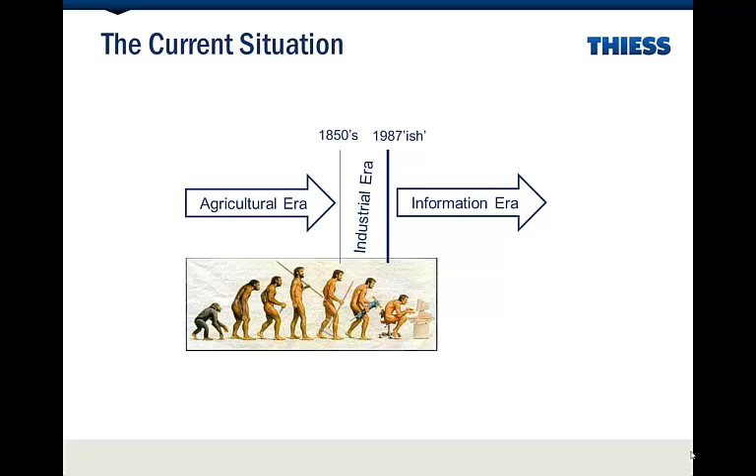I think I might have thrown this one up last time. I've since worked it a little bit more, but I think it's a pretty good icon for the current position we see ourselves in the world, where we used to build things quite manually, with hand tools and no machines at all. Then along came the 1850s, where we used machines, and the machines got bigger and better, and efficiencies increased through mechanical means. But now we're very much into the information era. I think the recent IBM report that they got Ibis World to do actually uses the term infotronics age, which is fine, but information era, I think, or information age is a good way to think about it. That progression there, where you see it going from just the sense of an evolution, and then eventually everybody sitting at a computer. I talk to guys who used to, even guys not much older than myself, 5-10 years older than myself, and they're quite amazed to walk into an office now and see everybody sitting in a computer, because it just didn't used to be like that when they first started. So it's this 20-year period where we've all come to be sitting in front of computers as the first port of call. But as I said, these machines are the ones we started with.

So Thiess's history started in the late 1920s, early 1930s, where there were 5 brothers from the Thiess family who bought this tractor, which they still have a lot of their old machinery.

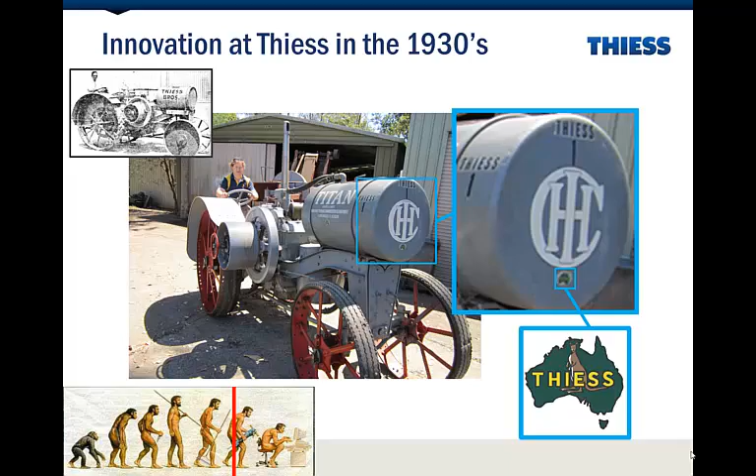This shed here actually belongs to the Thiess family at Sunnybank in Brisbane. They've still got a lot of the old machinery that they've done up and kept in good working order, which is quite interesting. So I went out there and took some photos, and you can see the black and white picture of it from quite a while ago as well.

So that's just to frame up where we started in the 1930s, and then the 40s and 50s. The Thiess brothers had to innovate. Everybody always has to innovate, but they don't actually like to admit to it a lot, particularly in the current day. But as you look through history, you have to innovate to keep your efficiency increasing.

As they started to build more things, airstrips and roads and eventually buildings, dams were quite big. They were always with the latest technology, to the point where they bought a plane.

During the war years, they did all sorts of stuff where they had to get up at early hours in the morning and make phone calls just to connect with each other, because the phone lines were taken away during the war and that sort of thing.

The picture of the Jeep in the jungle there is in Papua New Guinea, where when they couldn't get the machines they needed to build the jobs, they literally went to Papua New Guinea and pulled the wrecks out of the jungle that the American army left behind, brought them back to Australia and fixed them. So that was them innovating with what they had to work with back in the 1940s and 50s.

The drawing here is interesting, because that was their first major contract in Australia. In 1958 I think it was awarded a big tunnel down at the Snowy Mountains scheme, and they were the first Australian contractor to get awarded a big contract. I think it was $58 million or something, and they had to dig this huge tunnel.

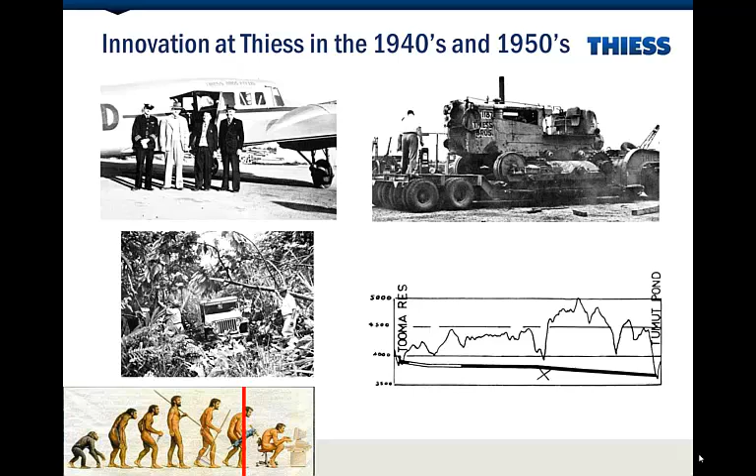So the next photo actually pops up, is a photo from the site where this cross is, and you can see on the profile of the land, it's the lowest point, so they needed to use that to access the tunnel for ventilation, and also getting machinery and everything in there.

So I think there's an interesting passage. Again, I know you've got the architecture and building focus here, but it helps people, I think, if you can think about engineering projects as being more general. Certainly one thing the computers does for us is actually enable us to think like that.

So I'm going to read a short passage which just describes the scene at that site when they first started.

Jacobs, who's a guy they brought out from America, was a real guru with tunnels, suggested that a small bridge be built, and the site located on the far side of the creek where there would be enough room for a workshop, offices and parking space for the underground equipment to be used. He then flew back to Sydney to design the equipment, and Stan got things moving at Deep Creek.

"I didn't have any surveying instruments," he said, "so I eyeballed the area and set a couple of D8s going on the site." An astonished Snowy Mountain Authority engineer appeared a few days later and asked, "Where are the drawings for what you're doing at the portal?" It was news to Stan that he had to supply drawings to get approval before starting work. He kept the men going, supplied the drawings later, and the Snowy Mountain Authority engineer winked at this initial piece of unorthodoxy and kept officialdom happy by giving written permission to level the site sometime after it was completed.

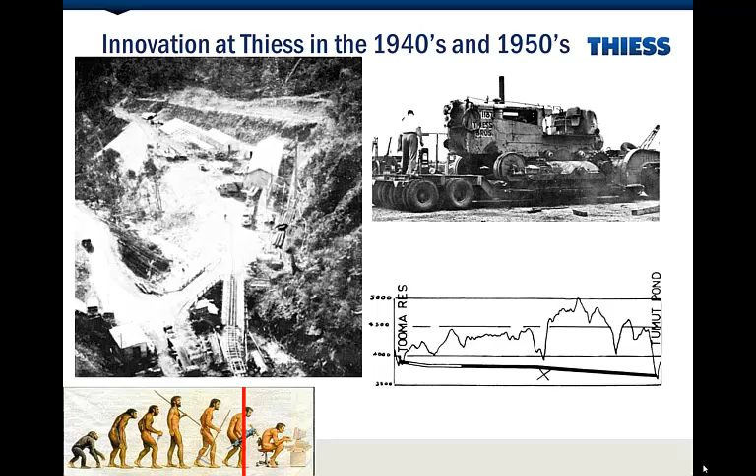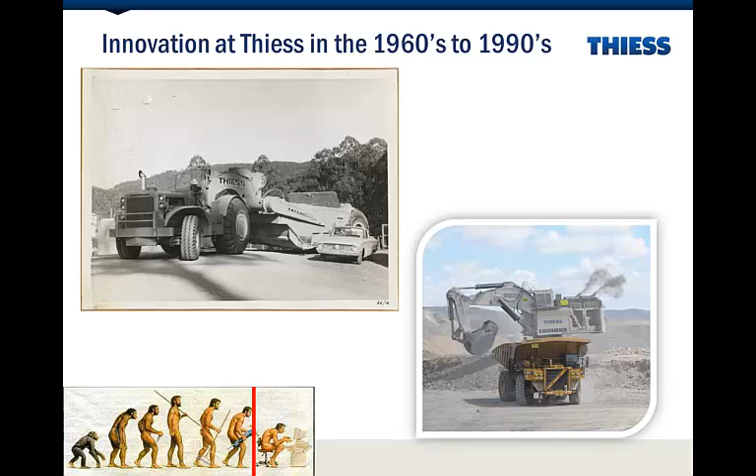So 60s to 90s, as I say, it was all about machines. This one's actually probably more recent—probably one of our latest photos from the 2000s, with the big 996 there and a large mining truck.

But in the 2000s and 2010s, I've got a picture of an iPad, but I don't mean it to be an iPad, it's just a computer. I've shown it overlaid there, and you might have seen the progression as we go with that red line on the timeline as well. So now we've got this extra layer where the computers overlay the machinery.

And in order to innovate, in order to increase our efficiency, we need to get smarter with the computers, get better computer systems that control the machines, that control the delivery of the projects, your survey set out and all that sort of stuff. All the information comes through the computers. So one of the best descriptors for those sort of workflows is BIM, building information modelling.

If you think of building in the sense of building anything—a lot of people would have liked to have chosen something different, but the way the software companies are dictating in that space, because they're the leaders, that's the term they chose. So we're talking about model-based construction, to try and simplify it a little bit for the older generations. But I think this one also helps too.

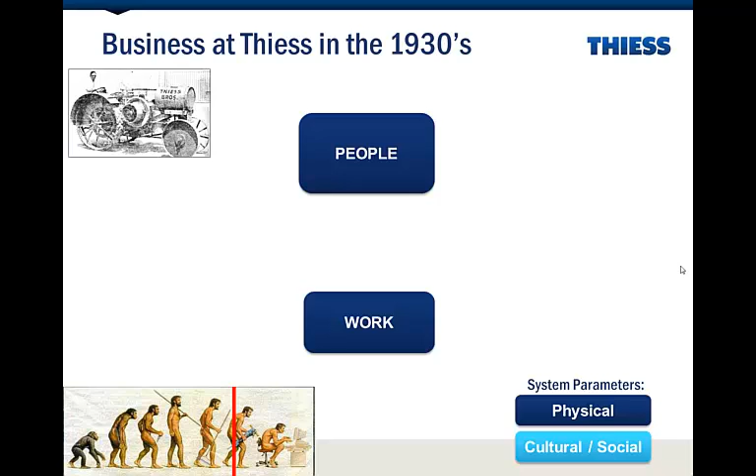So to wind that timeline right back and talk about a framework for business, where the Thiess brothers started up—they had people and they had work, and they were the two most important things. Look after your people and get your work done. So they communicated with each other to deliver the work, and the work earned the money that facilitated their life.

So now you go to the 40s and 50s. Actually, pretty soon after they started and got to become a big company, it was obvious that they needed some business minds and some accountants and that sort of thing, because the guys didn't have any qualifications in engineering or anything. They were just really passionate about getting some good work done.

So there was this phase, and it's all actually documented in this book here, which is why I know about it. We're one of the few companies I think that's had a good book written about their history, so I'm sort of just reiterating stuff out of there.

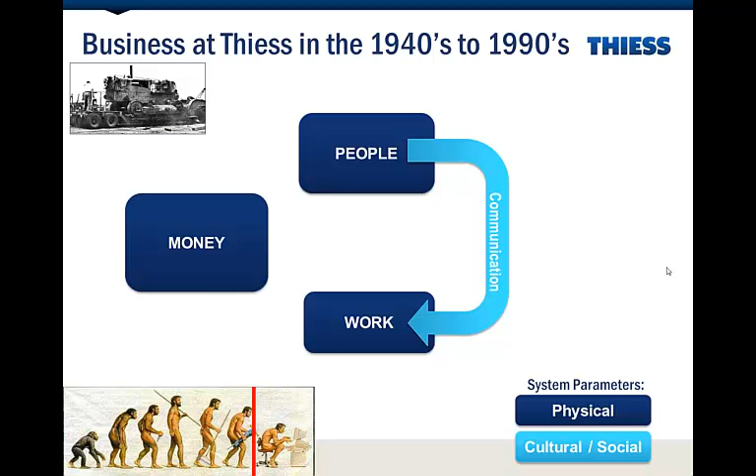But in any case, as I say, between the 40s and 90s, it was really about the machinery doing this work, and as long as you were keeping up with the latest trends there, you were successful. So your business relationships with your vendors and your suppliers, and your people organising your money for your company, became very important. But again, the money still facilitated their lives for the people.

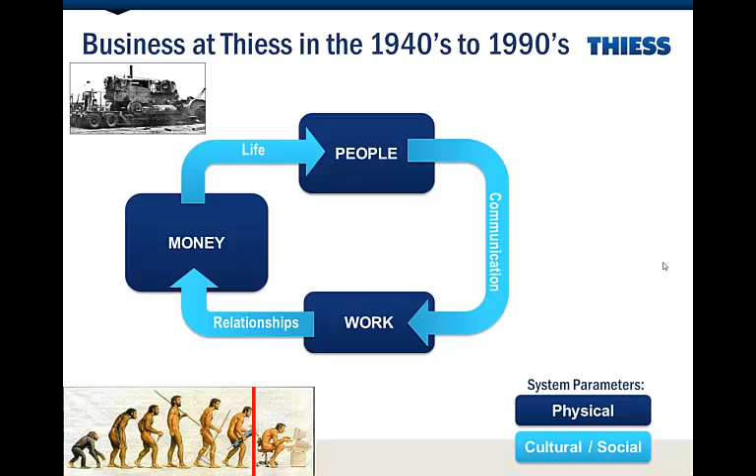So now, I think you've got this other one in there, which is the 2000s, and particularly as we move forward now, computers are becoming infinitely influential with what we do. And that's pretty broad to say computers. What that's done is actually plucked the technological element out of work, because there's still a lot of technology trends in here that we need to keep up with, the machinery and survey equipment.

But this one's the one we're struggling with the most at the moment, and we all need to work together to get it right. The information is the thing that has to go into the computers, and then it has to be communicated out of the computers to get into the real world. And with people who learn a different way of doing that, currently in the positions managing the company, it's really difficult to join the worlds and explain everything properly, because there's never any time.

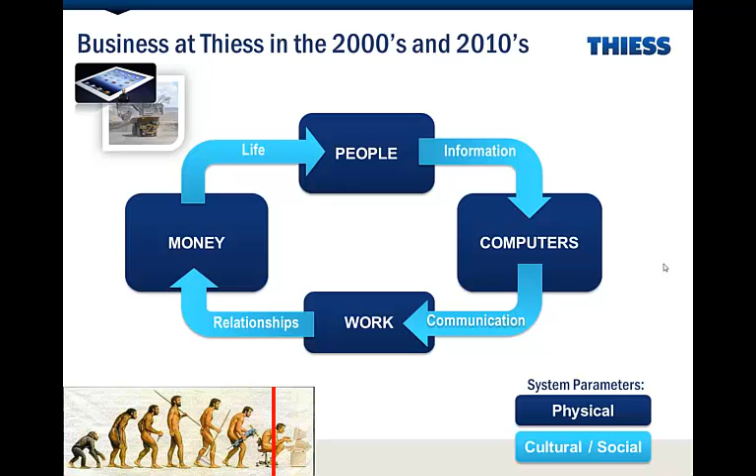When you're running a business, you've got to make money. So these sort of discussions are really useful, and these are the sort of presentations that I'm spruiking around the place, I guess, to try and raise our awareness about these things.

So back to the innovation term and the noun versus verb—there's just some icons there again to stress the point that there are two forms of the word. Renewal is a very good word to try and think about innovation. You're constantly renewing what you're doing to stay ahead of your competition.

Obviously, a positive change is an efficiency-increasing change, and innovation really is just a bigger word for change, but it's a structured change. In everyday terms, you could say we're just making the best of what's around, and combining things is another good word.

So, I mean, you look around you, with everything you do in your life, things get combined to remove an interface. That's increasing your efficiency with so many things that you do in the current world. I think that's a good way to think about innovation.

This little cartoon is also another one I often use to make that point. At the end here is an interesting point where human nature is to make a knee-jerk reaction about any suggested change. I've overlaid that to tidy it up and make it fit with that noun versus verb situation. The little triangular mouse at the end is a typical knee-jerk reaction I see, where he doesn't want to make the change because he perceives it to require extra effort, when actually the end result is achieved much quicker by using what they're proposing.

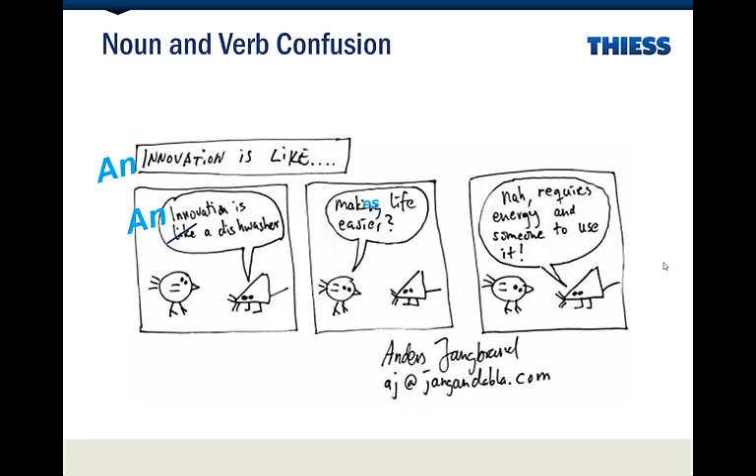So the big bang for buck, BIM and model-based workflows. So we'll talk about that.

Now these slides I've got here are actually from a BIM in Practice conference last week, chaired by Building Smart. Are you familiar with John Mitchell? When I was a cadet architect in 1974, John Mitchell worked in the same office I was in, so I've known him for nearly 40 years. He's a very passionate leader in the industry for BIM and model-based workflows, and he chaired the conference.

Last week my best and brightest engineer with BIM workflows came from Melbourne to present the slides that I've got here. He started with this one, which I thought was interesting because he's saying, what's the end game? Why are we doing all this stuff? What's possible? I don't know whether you've seen these.

I could certainly send through the links after today. There's places in Asia where they're putting buildings up in a frighteningly short amount of time, and telling everybody about it without any reservation for keeping things close to their chest. I think this is a real big message for the Australian industry. We can do things a lot better, a lot quicker, and a lot of it's about modular prefabrication and this sort of thing. But BIM is an enabler for that.

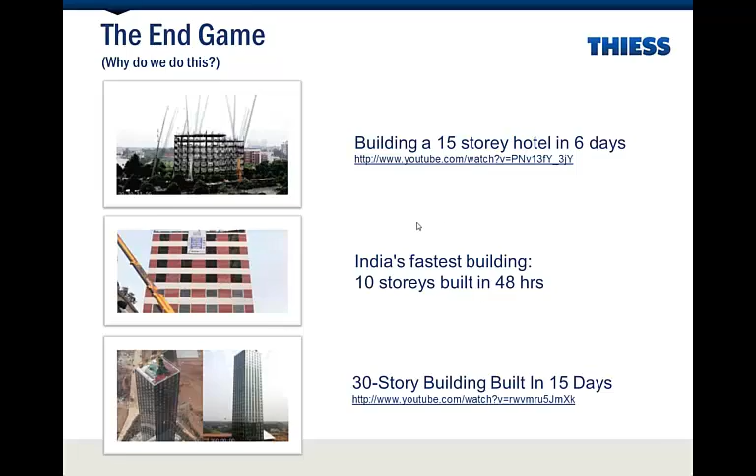So innovation is the way to go to get things moving, and as I said, BIM's the main one we should be focusing on. Now this one's pretty startling, because it's saying, of all the countries around the world, who's adopting BIM at what rate?

And the blue one is us. So we're here. I think this slide came from Davis Langdon. There's a lot of research being done and people writing papers about why and what's happening, but it's charts like this which really bang it home.

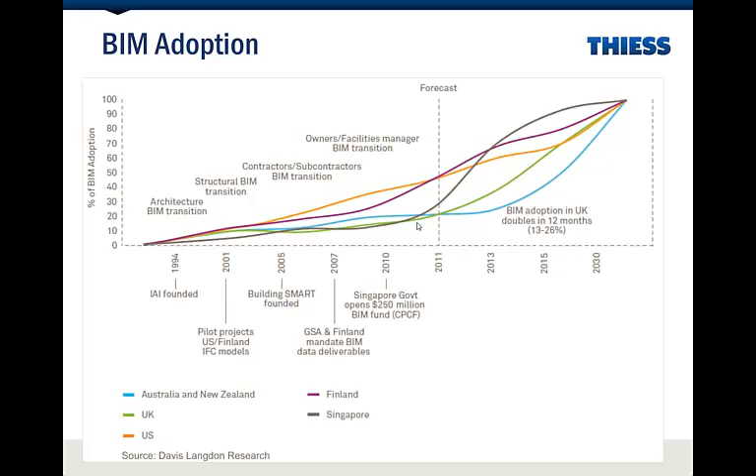But then proactively thinking rather than doom and gloom, these sort of slides are also very useful to show people where in the delivery cycle of a project BIM is going to give us the benefit. Now that's a big chunk, and it really is hard for people to think all the way through to 50 years after you've built a building.

But the reality is we know that there is this infinite—well, not infinite, it is finite—benefit that can get there. But you've got to make the decisions early to get there, because there's only a little bit of benefit right at the start. If you change the way you're doing things, if you start working with these model-based workflows, you can access all this value later on in the project life cycle.

We're getting a bit mixed up right now between IP issues, where people think particular pieces of information are their IP. It's easy for us in a sense because we don't hold any IP in information—our IP is how good our people are at getting it done. Whereas people before that, your designers and your architects, the information is their output. So depending on how good they are at making that information, that's where their IP comes from.

It's interesting, I think Rick, that you get me to come down here and talk as a contractor in many ways, because I'm sure you're well aware of all these interplays in the industry. But BIM is the great engager for everybody—it's everybody working on the same platform, integrating others that don't talk to each other, and everybody understanding their work much better as we do it.

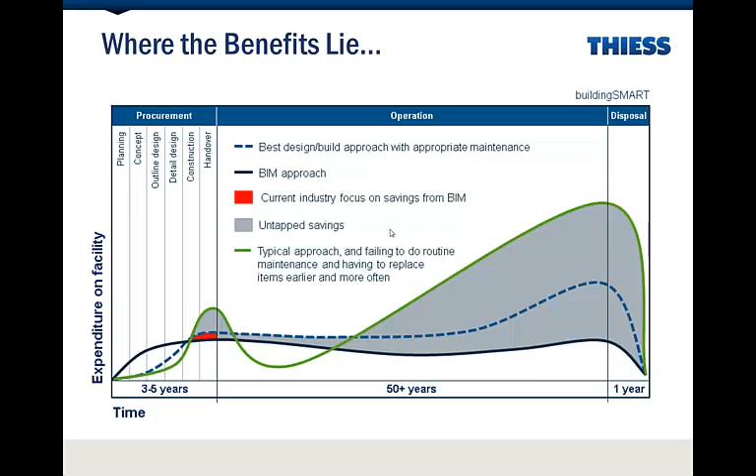I mean, guys like John Mitchell are very, very helpful. I was really pleased with that conference last week where he's now heading off to the federal government in Canberra to try and get some funding to push BIM and standardise BIM, which is exactly what we should be doing.

This one will get blown up in a couple of slides where you see people out on site with iPads. We're starting to use the models on site for toolbox meetings - I think I had some of those photos last year as well. So just over the last 18 months, things have really started to ramp up in terms of relying on these models more than the 2D drawings, to actually materialise that in the real world.

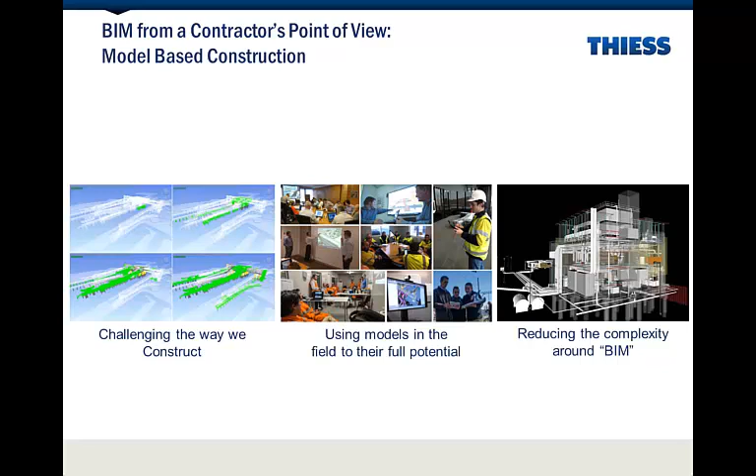And there's another one. So now we're about reducing the complexity around BIM. BIM has been seen over the last, probably up until about 12 months ago, as something that was just scaringly complex. But it's certainly not the case, and a lot of our internal work in terms of putting strategic plans and capability statements and that sort of thing in place for us to use with our clients is to show that it's not that complex and that we can actually leverage it to build things better.

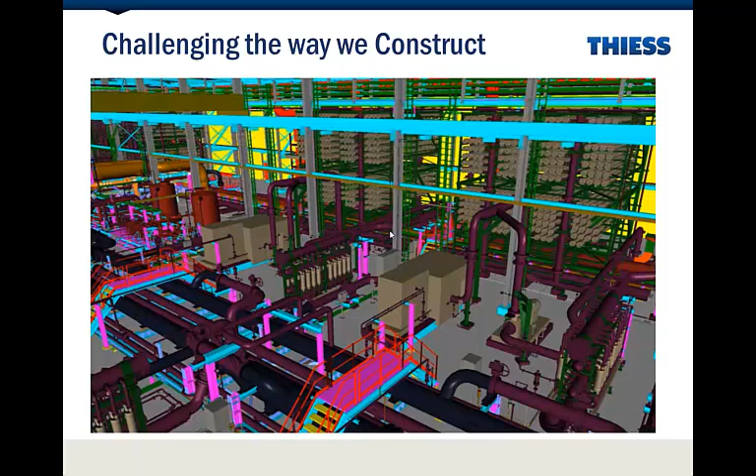I think I showed this slide last time. I think it's very indicative of the fact that we've got a model - maybe that wasn't the right slide, but I thought it was going to be. That's a shame, normally we might see it later, because these slides have actually come from my guy in Victoria that I'm presenting. But I do have a version of this slide where you see the model and you press the button and it just literally fades into reality from that same perspective, because that's the model and we actually built exactly that.

But this one's a recent one that we've done down in Melbourne there with the Regional Rail Link. The guys are actually getting models in their hands where they can simulate the vehicle movements, they can measure things, they can understand risks well ahead of time. So safety is a big thing, and safety is almost the ultimate thing in the industry, because it's a KPI that we really have to work to. And if you can have an information management system such as BIM that's going to help you reduce your safety and also your process risk, technological risk, then it's a very useful thing.

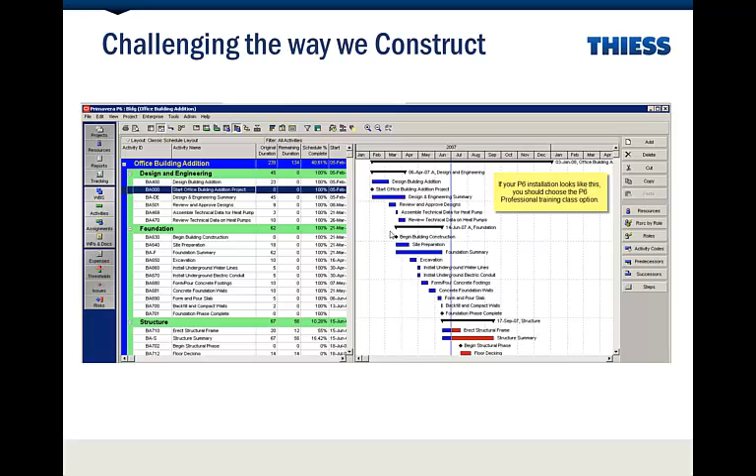As I said, we're challenging the way we construct. This is a view of a P6 program, a Gantt chart that has been the norm for quite some time, probably 20 years. But we're saying that's not what we're going to do anymore.

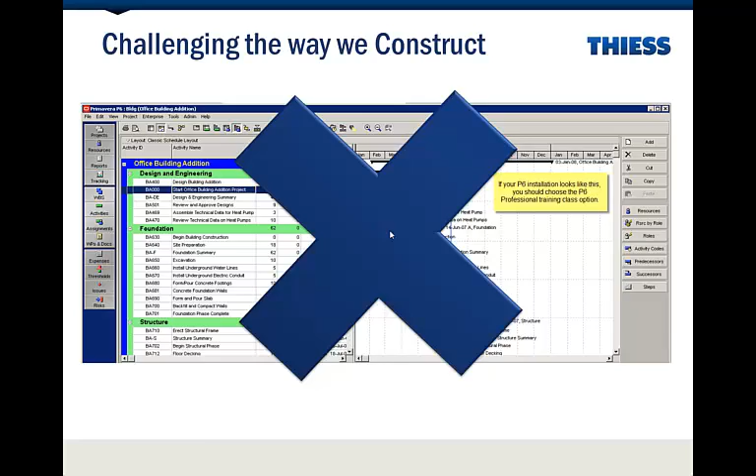We're going to use more streamlined forms of communication, communicating information in terms of graphical displays. As long as we know that whatever we're exporting from a database or a model is correct, and the graphical information represents the time change information, then there's nothing wrong with doing that, because people understand it much quicker.

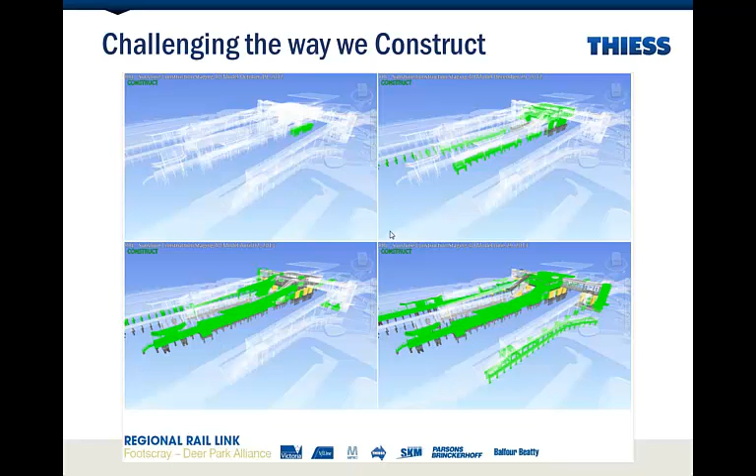Here's that one blown up where you see a railway station we're partway through building in Melbourne at the moment, and you've got a progress timeline there where they're showing what they've done. The green is the work that's been completed as it progresses through time, and the date rolls around with the little white text on top.

So now this one should play, and you actually see the model that the guys used to do a package of work over Christmas. This is the Regional Rail Link, and you've got a heap of machinery there. Every vehicle in this model, and this is just one perspective with all the activities rolling around.

You can navigate yourself around, press pause, select things and get information out of it. But as a distributable piece of information, you save a video file. So this is a video from one perspective. We'll see a couple of other perspectives as images later on.

Basically, it's one of the most horrendous situations to get work done, because you've got live trains that need to keep going. So the guys have got to come in, do the work, and get out again, as per the negotiated timetable with the rail authority. And the guys modelled everything in advance, so they know where every vehicle is going to be every hour that's involved.

The big win story for this package of work we did over Christmas in Victoria is that they actually encountered some unknowns throughout the delivery, which is what always happens, and that's where you lose your targets and your progress.

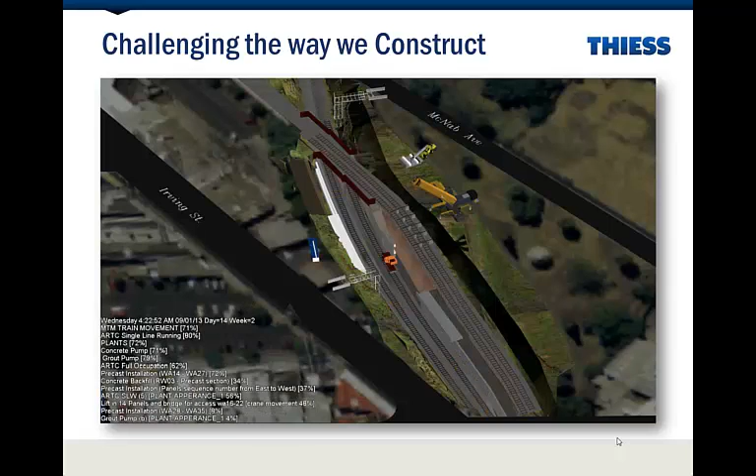So to have a mechanism that enabled them to make that time back, it's really hard to put a return on investment on it. People always say one of the inhibitors for BIM's been that you need to tell me what the return on investment is. Well, it's almost past that now. We've got some numbers here which show how many hours we actually saved by modelling it in advance.

This one is another version where you can see what I was talking about, with the model fading to the real situation. You really can't argue with that. The project was documented and modelled in the computer ahead of time, and we knew what we were going to do.

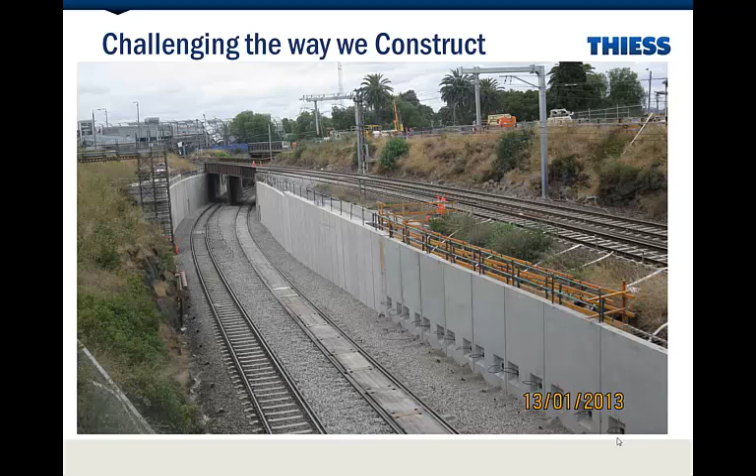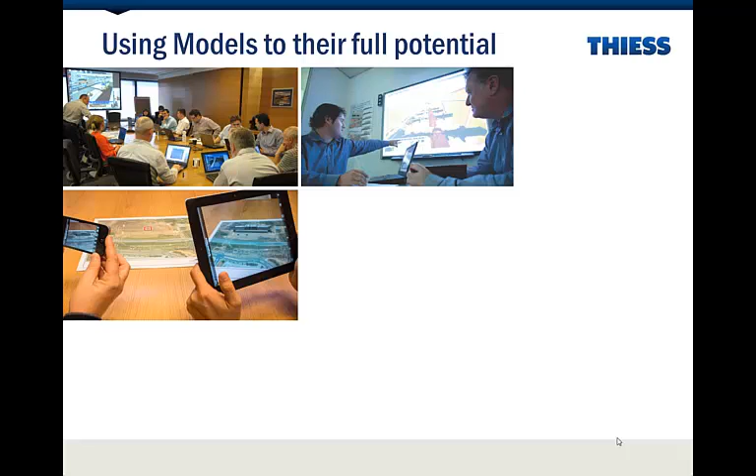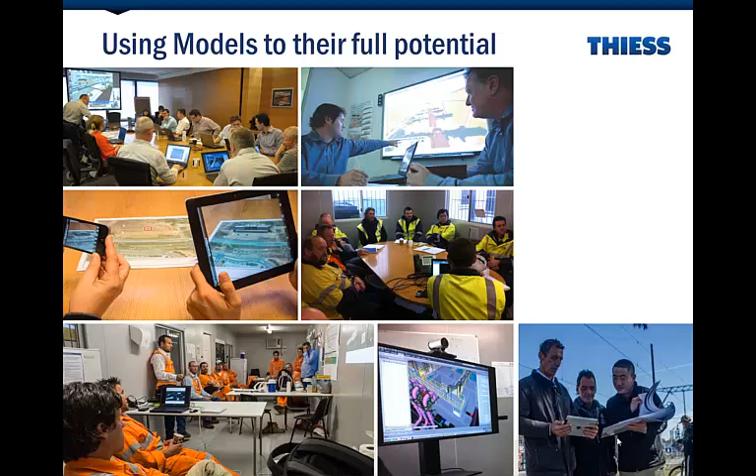That's a toolbox meeting that we had at Vic Desal, and there's a toolbox meeting we had down at Regional Rail for that package of work that we saw the model for. That's a senior guy on site with his iPad, and they actually had a race to see who could get the information first, whether from the iPad or the set of drawings, and the iPad killed it.

So there's another guy on site with a handheld. Everybody's connected. Wi-Fi's a fantastic thing, and even nowadays you've got 4G coming along, which is quick. That little thing there I bought last year is the 4G wireless. You can have 15 people connect to it, and the speed's actually better than my cable at Western Suburbs in Brisbane. So the speed's coming, and a lot of people don't understand that's what the NBN brings to us, the connectedness.

This is a work pack where a supervisor's dumping images out of the model to show his sequence of work and help communicate what needs to be done with his guys in the field.

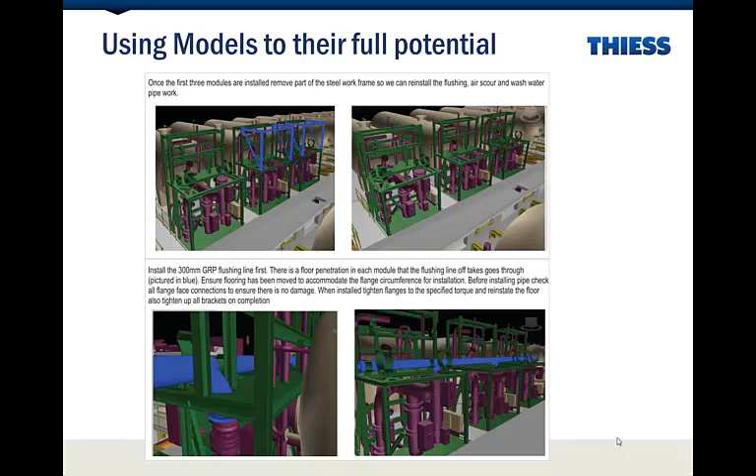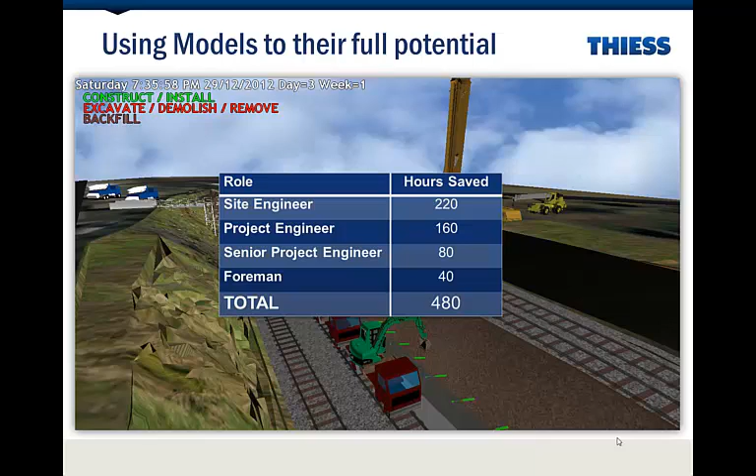Ultimately it can be viewed as a tool. We have design managers, planners, estimators, document controllers, cost controllers, and procurement people, without even mentioning engineers, project managers, construction managers - these are just core disciplines of people that have a job to do and have a stake in the BIM.

Because if your BIM is correct and corresponds with your 2D documentation, it's an easier place to get information from. You can go in, pick something, right click, and find out who's supplying this, what materials it's made out of, how long it is, isolate it, have a look at it, all ahead of time before you even get out into the field.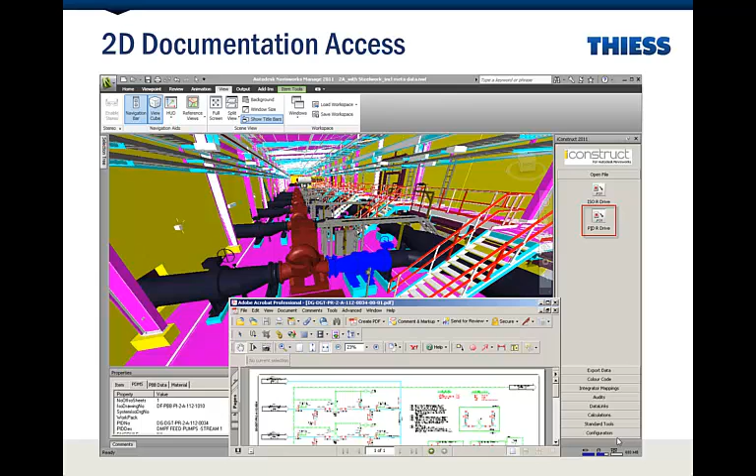This is a good screenshot from a typical model review where I think there would be an architect's model overlaid with a designer's model. It's particularly good for that interface because you can take both of those models and put them together well before even the contractors come along.

During design development, if you overlay your architectural model with the designer's or engineering model, you pick things up that aren't consistent and the engineer's going to push back on things. With conventional information workflows and 2D workflows, the turnaround is much longer because you'd see a marked up drawing, then somebody lodges a request for information, puts that into the doc control system, and weeks later someone responds to it.

Whereas this way, if you're all live, we've done model reviews in a live situation with designers where we've said, no, you've got to move that, it can't be there. They note it down, it's tracked as part of all these viewpoints. So the guys say this one, they've saved that viewpoint, they've circled it and said, put the comment in over there, what is that?

So move east to avoid the trenches. You note that there, you can say who's relevant for the comment and what needs to be done, and it's all tracked.

And then using iConstruct that I showed before, it's just a button you press at the end of the meeting, which collates all that work into a PDF file, and then you lodge that onto the doc control system. Because then anybody can get it, see what happened in that meeting, go and do the work they have to do, check it off, and the world turns.

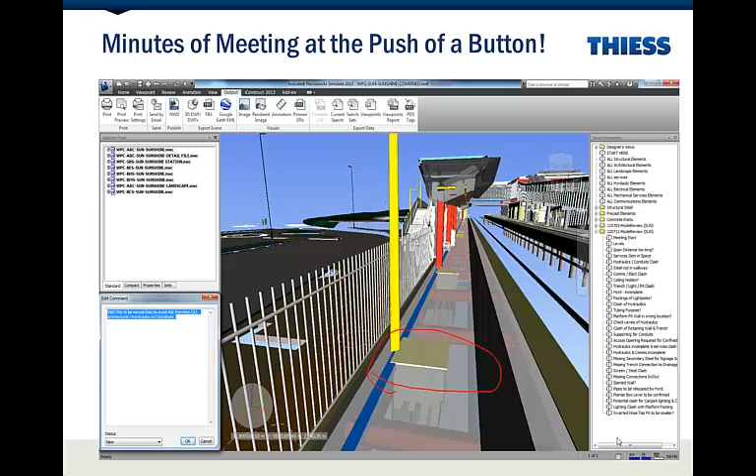So there's the PDF export from the Regional Rail project. It's just a template - it's sucking that information, sticking it onto a PDF file, and making sure that we don't get that problem on site. We fix it before we get on site.

Quantities, we're getting there in terms of people signing off on their model. When the legal factions of the world are happy with the risk exposure and that sort of thing, the designers can start actually signing off on their models for the quantities, and we can order materials and all sorts of things directly from the model.

So this is actually a quantity export from the model. It's just a spreadsheet. Everybody's trying to phase spreadsheets out. They're still very useful, but the world needs to get to a place where we don't actually rely on spreadsheets. In any case, that's a quantity export, so we'd call that a material takeoff.

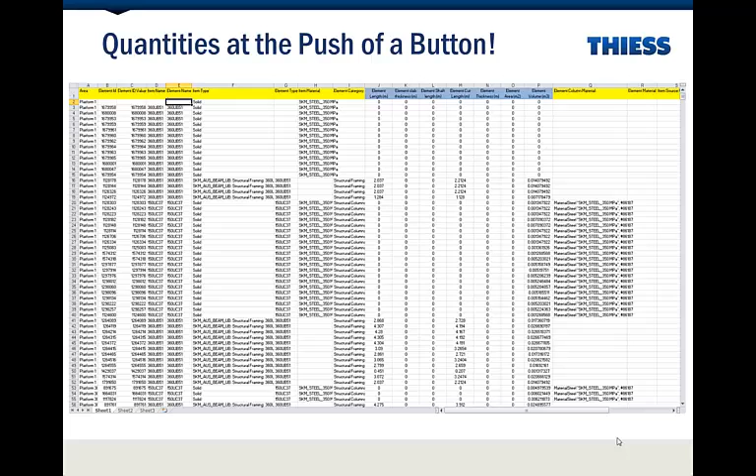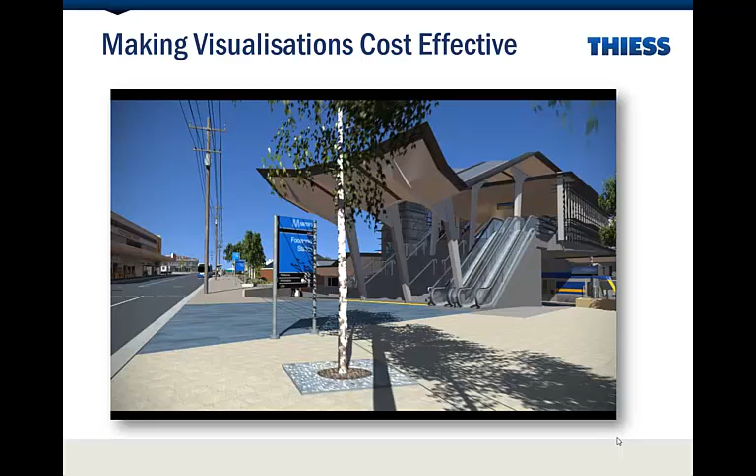Particularly with jobs in built up areas, government clients are quite demanding of nicely rendered representations of projects. It's interesting when you're working in mining and with mining consultants, they really don't care what it looks like. So you juggle both worlds, and we pay consultants generally to do a nicely rendered model if we have to have a TV exposure for the design, or certainly magazines and things like that. So this is an image that's been done for the Regional Rail project by the architect.

And I've probably raced a bit, but this is the last slide. I think it's a good one though. The story behind it is very interesting. You saw all those models that we had for Regional Rail.

There was a guy on site took it home and had it on his laptop and was mucking around, and his son or daughter got on there and thought it was a computer game, so had a bit of a look around. Anyway, his 7-year-old child didn't go to bed, went into his room and did a drawing, stayed up all night apparently thinking about it, and drew what his dad was looking at on the computer.

And this is supposed to be a tower crane, and the way he interpreted it was really not too far from what it was. He's put some machines and stuff in there. But yeah, it's a great story because he engaged with his 7-year-old son with the work that he was doing. So that's a big high level story for BIM, is that it really helps everybody engage with each other and understand things much better.

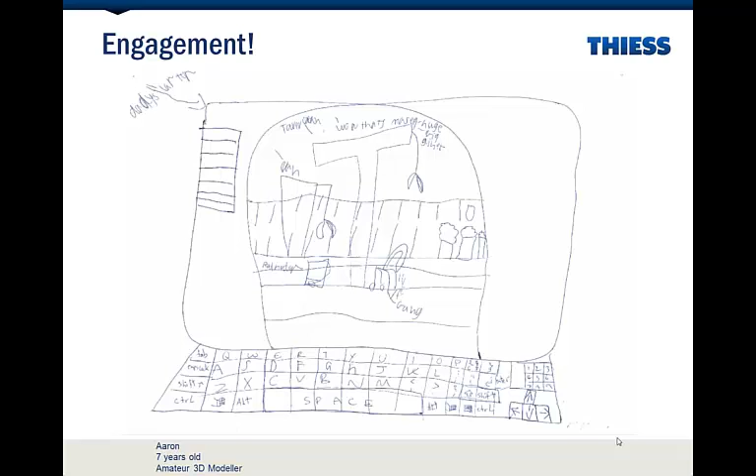So plenty of time for questions and discussion.

Did you find initially that it was difficult managing what you produce modelling wise and your information input into what practically goes on site, in terms of contractors understanding, taking off from the model, taking off what they actually had to physically do on site? Did you find there was any...

I mean, for me, I understand the process. I've seen many things get materialised that were a model, modelling things and then seeing them built. But I get your question. The guys on site haven't come from that background, so you've got to work with them. You've got to get them to do the work.

So we actually just print a lot of images. Where they would have previously got a stack of drawings and a construction program, they'll still get that, but we'll save out 200-300 images, viewpoints in the model, and just print them. Because on site, the game is to get the job built safely and as quickly as possible. So if someone's asking you for some information, as a project engineer, you give it to them if you can. And if the work crews are saying they want to see a folder full of printed images, well, that's what you give them, because it helps them do their job.

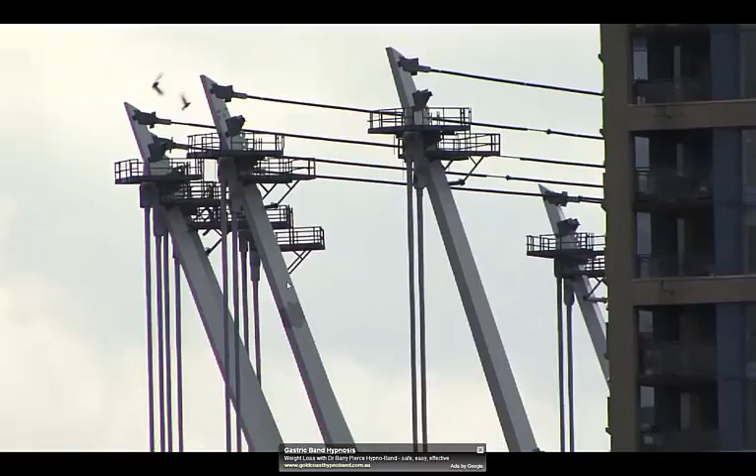Man, sometimes you see things that absolutely boggle your mind. I mean, you just go, how did they do that? Let me set it up by this. Over my shoulder here, you can just kind of see BC Place. I'm in Vancouver, British Columbia, and we have this place called BC Place. They decided to put a new roof on it, one that opens and closes. The only thing is, it won't open or close in the rain. But who needs that, right? It's taken them like 2 years to put a roof on.

So this guy sends me an email and says, you got to take a look at this. The Chinese built a 15-story hotel. That's right, 15 stories. A lot of people build a 15-story hotel in less than a week? They put the whole thing up, the foundation, all the floors, and they even say it can withstand a 9.0 earthquake. Nobody got hurt. They worked 24 hours a day and put it up in under a week, I think it was just 6 days.

So take a look at this. We have some time-lapse photography, and you won't believe it. I mean, take a look at this. And then here's the deal, I'll be right back, but take a look at this. You'll enjoy it.

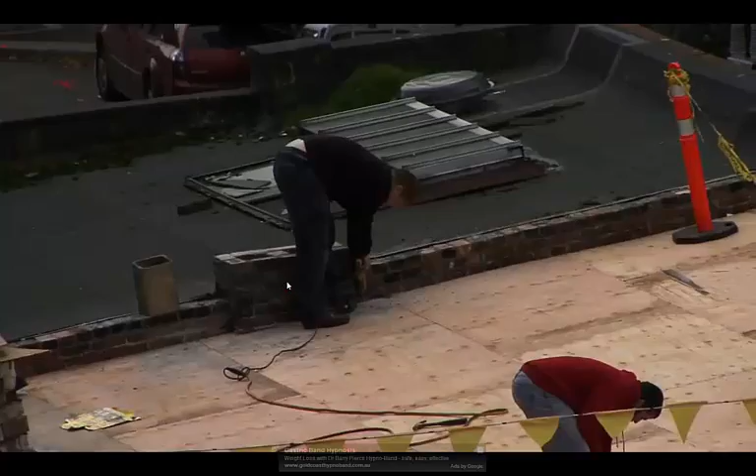So is that not the most unbelievable thing you've ever seen? A 15-story hotel built in China in 6 days. We have some guys just happen to be working on a roof over here, and it's a simple thing, they're just putting on a small little roof. We'll get a picture of that as we go out. I bet it's going to take them at least 2 days to finish that project, maybe 3. Hey guys, move to China, you can put up a 15-story hotel in 6 days, no problemo. That's not Chinese, but it's amazing. This is Doug Coy, so what do you think?

Yeah, so my point about the nice flat site, the number of cranes around the site, all able to work - but there had to be a huge manufacturing facility somewhere. Whilst the actual putting up of the thing may have taken 6 days, there would have been months of prefabrication. Yep, months and months, and it's a very repetitive building, it's a pretty dull building really. So yes, it's doable, but it's kind of a false picture, isn't it, in a lot of ways.

That's why it made me wonder, I mean, does that sort of approach - you talked about Laing O'Rourke and Ray O'Rourke's vision of building as manufacturing, and certainly Laing O'Rourke in the UK have moved towards, wherever possible, modularisation and so on. But how does that affect you guys, given you're doing engineering work - how applicable is that to you?

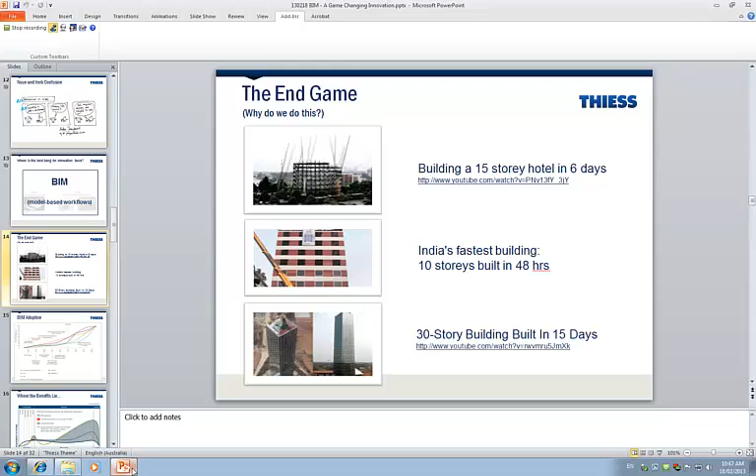It's always good to hear what's really happening out there. But actually, it seems to me that you talk...